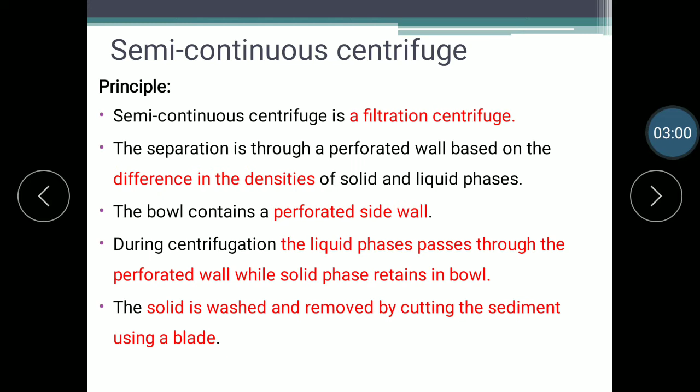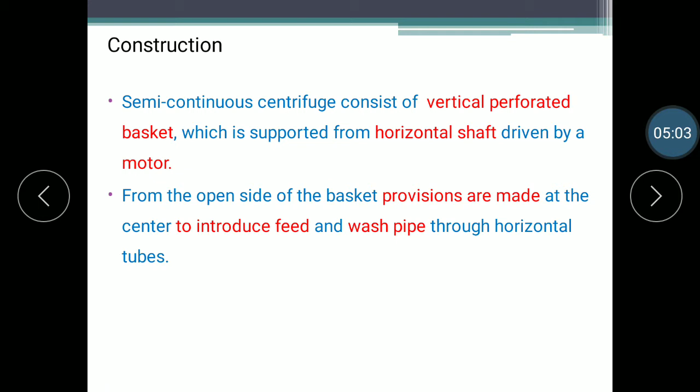One provision will act as a feed inlet and another provision will have the wash pipe, which is used to wash the solid which is retained inside the bowl or inside the container. Okay, then this is how your semi continuous centrifuge will look like.

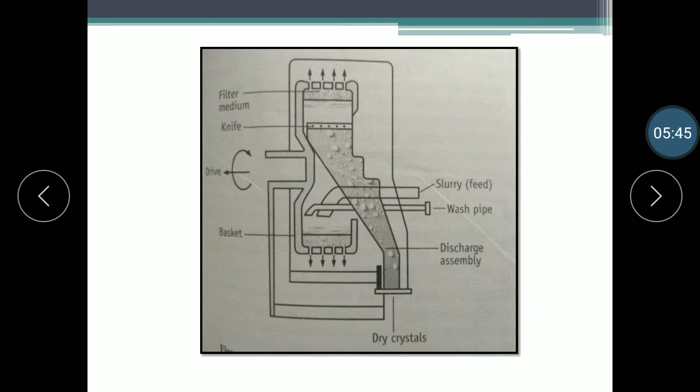Okay, then working of this semi continuous centrifuge: the perforated basket is allowed to rotate and slurry is introduced from the side pipe. As the perforated basket is connected with or driven by the motor, it will first get rotated, and after the rotation of the perforated basket the slurry is introduced from the side pipe. Okay, so during centrifugation the slurry passes through the perforated wall.

ठीक है, कि जब आपका centrifugation होता है at that time the slurry will pass through the perforated wall. Okay, solids are retained in the basket while the filtrate leaves the basket, which is collected at the filtrate outlet.

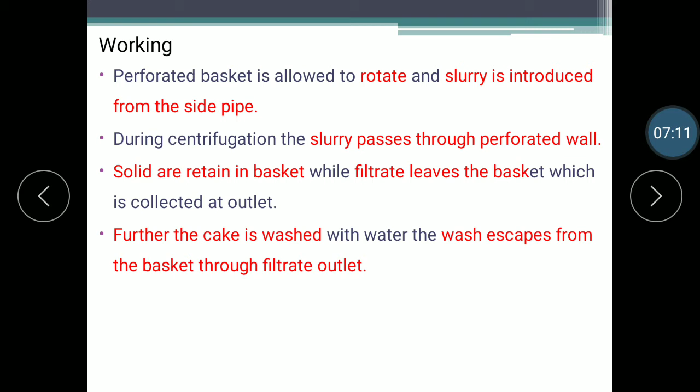The wash escapes from the basket through the filtrate outlet. उसको धोने के बाद, उसको वॉश करने के बाद it will get बाहर निकल जाएगा through the filtrate outlet.

Okay, so next is the super centrifuge. So the super centrifuge is a sedimentation centrifuge, means again on the basis of difference in the densities, the solid or the heavier particle will get settled down, will get sedimented, and the lighter will remain upward. ठीक है, so generally this super centrifuge is used for two immiscible liquids.

ठीक है, कि दो immiscible liquids जब होते हैं तो at that time for the separation of the immiscible liquids this super centrifuge is used, and depending on the density of the two liquids the separation is done. Okay, means यहाँ पे the heavier liquid will sediment at the bottom, and the lighter liquid will remain at the top. Okay, means the lighter will be separated from the top and heavier will remain in the bowl.

Okay, so this super centrifuge is the sedimentation centrifuge. The separation is based on the difference in the densities between the two immiscible liquids.

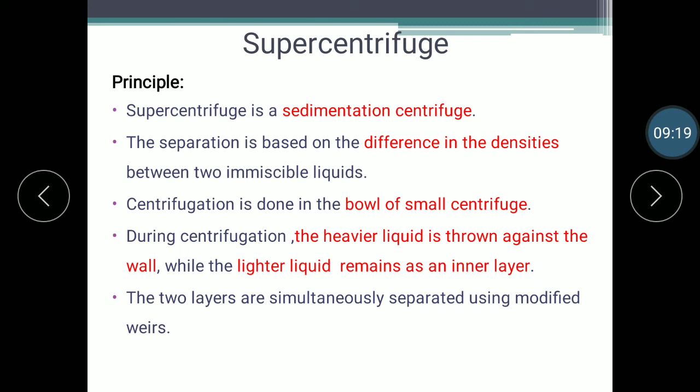The construction of the super centrifuge: it consists of a long, hollow cylindrical bowl of small diameter. It can be rotated on its longitudinal axis, and provision is made at the bottom for the feed inlet using a pressure system.

So the provision is made at the bottom which will act as a feed inlet, using a pressure system. Two liquid outlets are provided at different heights at the top of the bowl, and the modified weirs are attached.

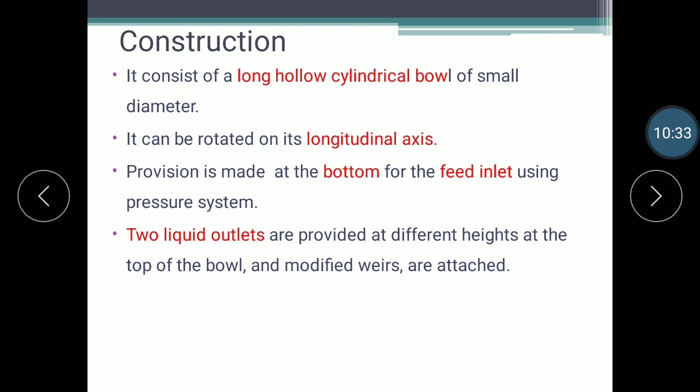So see, this is the diagram. This is the hollow tube, long and small hollow bowl present, in which the rotating bowl is there. This is the feed inlet present, and these are the two provisions present at the top.

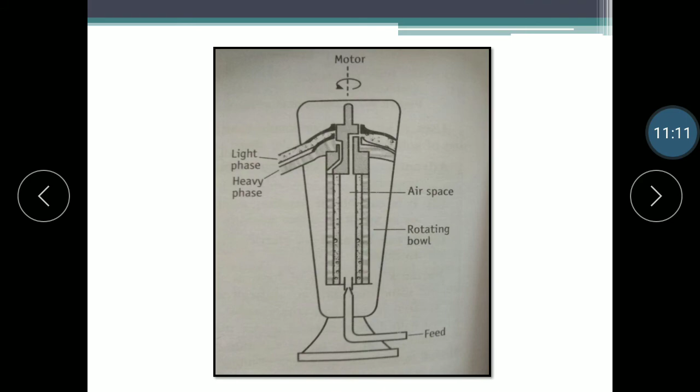According to their difference in densities, the heavier will settle down and the lighter will present as an inner layer at the top. The lighter comes out from the top and the heavier comes out from below it. So this is how the two liquids are separated, and it is driven by a motor.

Then the feed is introduced from the bottom of the centrifuge using a pressure system. After that, during centrifugation, two liquid phases separate based on the difference in their densities.

So this is the basic principle for all of them: the centrifuges will separate the two components, two substances, depending on the difference in their densities. The heavier liquid is thrown against the wall while the lighter liquid forms an inner layer.

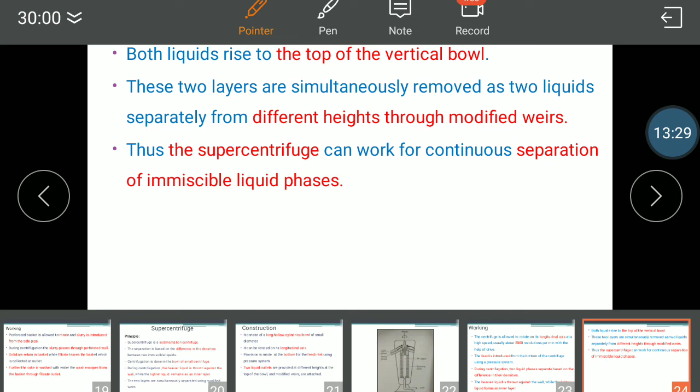If an MCQ question asks, given four options - perforated, non-perforated, super centrifuge and continuous/semi-continuous centrifuge - among the following centrifuges, which centrifuge is used for the separation of immiscible liquid phases? You have to choose the super centrifuge.